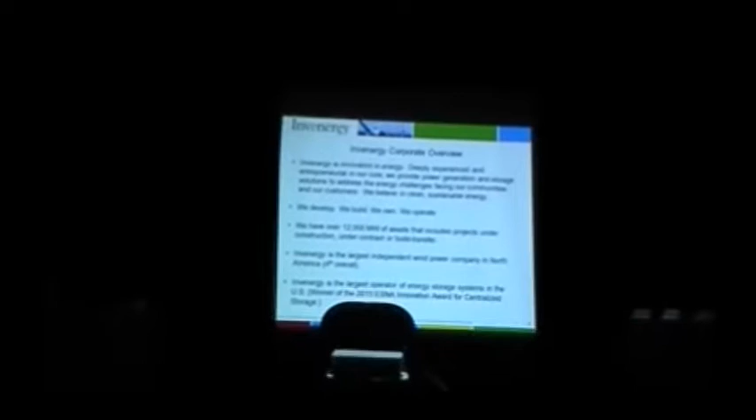Invenergy is an independent power producer. We were formed in 2001. We build, we own, we operate. Our focus is primarily renewable energy, and that was the foundation of the formation of the company. To date, we've developed approximately 12,000 megawatts of projects throughout the U.S., Canada, Europe, South America, and some projects in Japan.

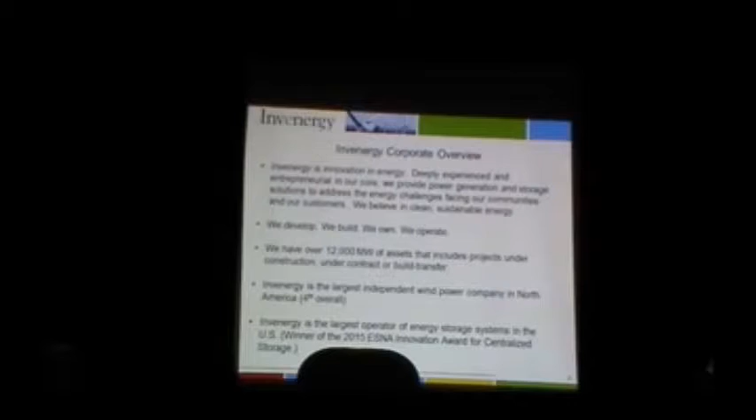We are the largest independent wind power producer in North America. We also have a number of energy storage projects, and we are actually the largest operator of energy storage projects to date. You can get a sense of the scale of projects we have here in the U.S. and in Canada. These are all wind, thermal, solar, and energy storage.

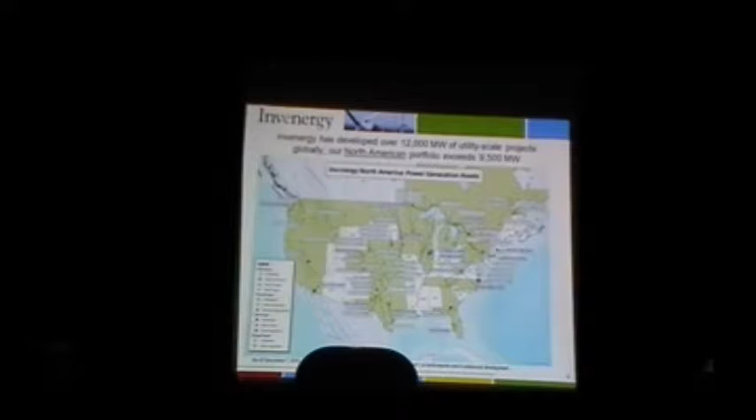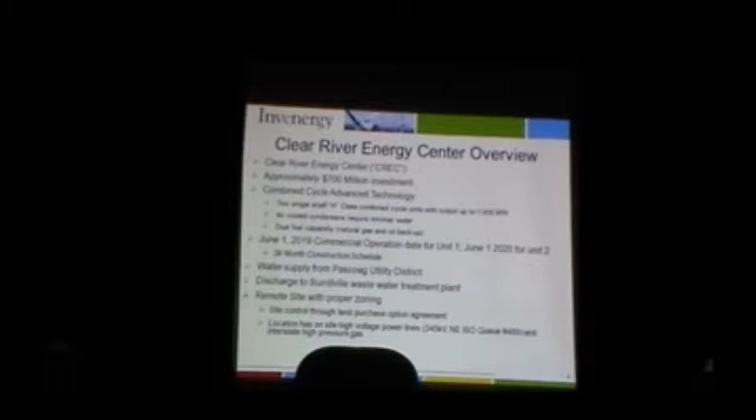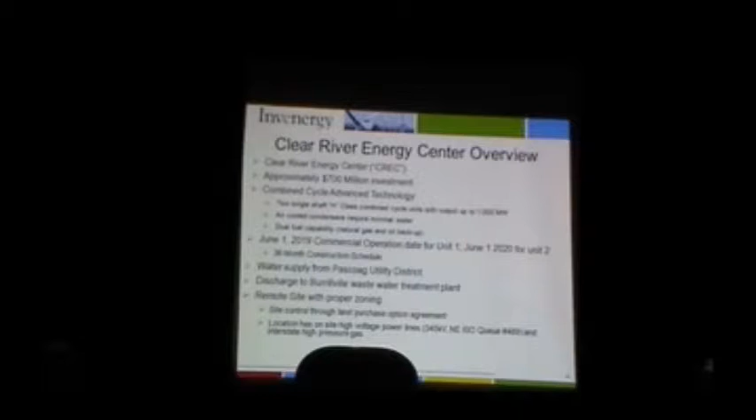The Clear River Energy Center was a project that we put together in response to signals we got from the New England ISO, who manages the New England grid. The signals come in the form of the results of annual capacity auctions they conduct every year, on a 3-year forward basis so they can maintain reliable electric supply. That's really the main reason we looked at the Rhode Island, Southeastern Mass region for locating this plant, because in the past several auctions conducted, this region had insufficient capacity, and as a result, the price the ISO was offering for projects located here was at the cap that the ISO set.

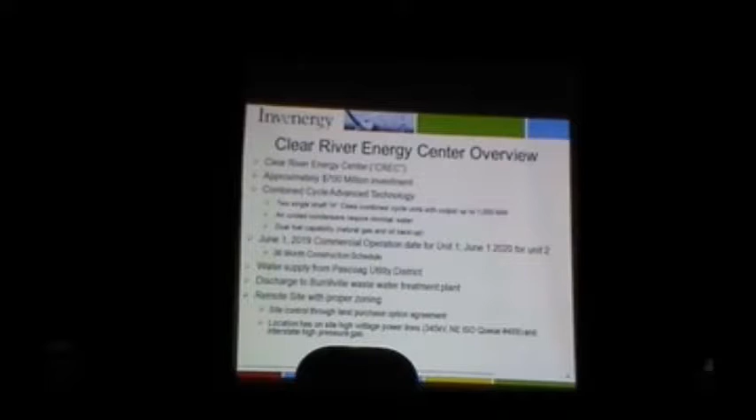So the project we're proposing is a combined cycle project, which will be the most efficient power plant in New England. We've selected GE for the technology, and this is what they term their H-class technology. Just to give you an idea of combustion turbine technology, you may be familiar with the Ocean State Power Plant, where they have 4 combustion turbines and 2 steam turbines. That plant was built back in 1987 when it came online.

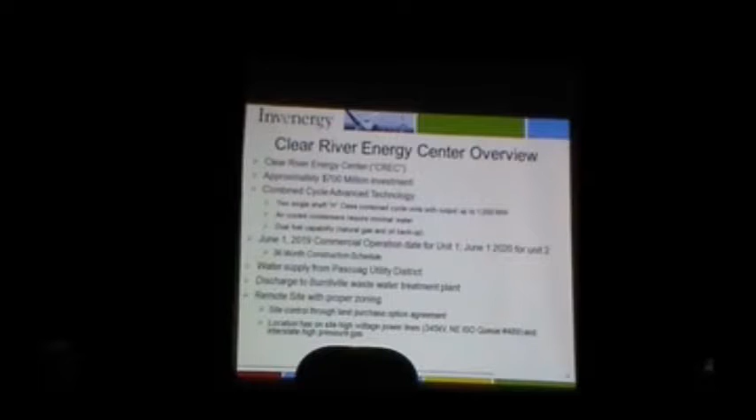The manufacturers give these machines letter designations. So the Ocean State Power Plant was called a 7EA. They've gone E, F, G, H, and in doing so, the combustion turbines have become far more efficient and produce far more power. So with a single combustion turbine and steam turbine combination, the Clear River project with just one of those units can produce roughly 500 megawatts, where back in 1987 you needed 4 machines to produce roughly the same amount of power. It also does that by being about 30% more efficient. So you can produce more power with less gas, and it also does it far more cleanly. In other words, the emissions are less on a pound per megawatt hour basis.

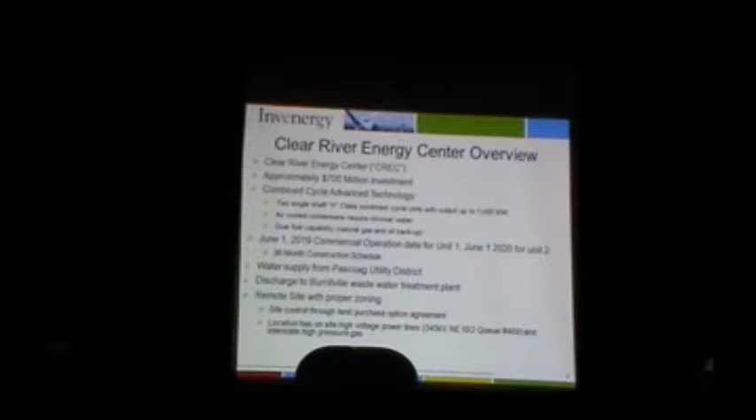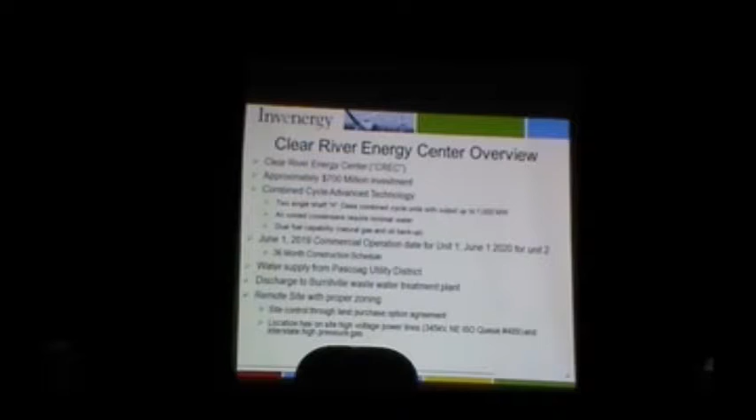We bid the project into the New England ISO's last forward capacity auction, conducted in February. That would be for an online date of June 1, 2019. We had configured the project so it had multiple, or 2 trains, 2 gas turbines, 2 steam turbines, each on a single shaft. The reason we did that was because we weren't sure—we knew there was a need for power, but we weren't sure how much the ISO would select in this past auction.

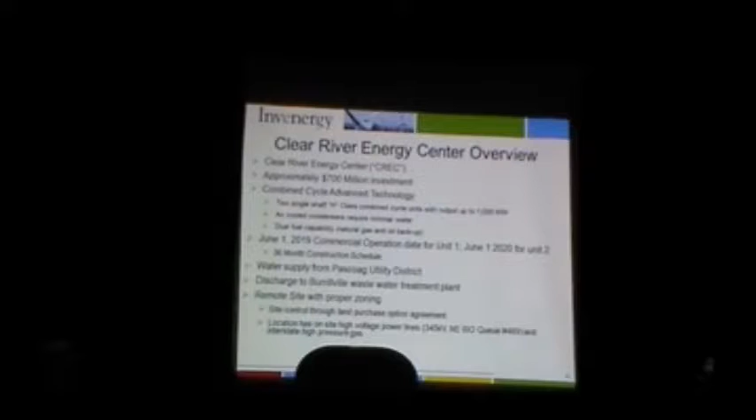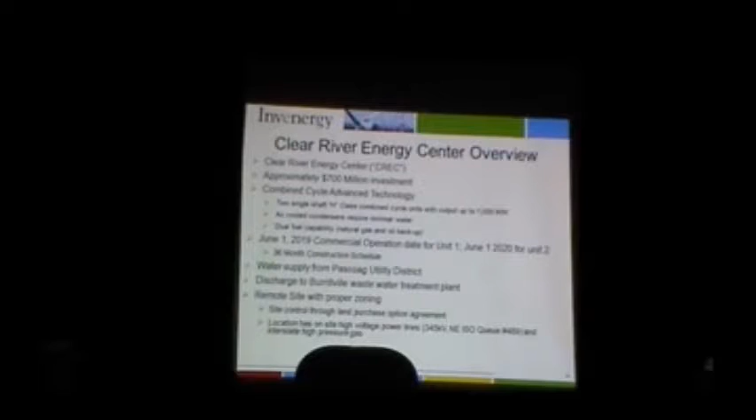So we broke up the plant into these 2 blocks, much the same way Ocean State Power did back in the day, where they did it in 2 separate blocks, just because it was not certain to us how much the ISO would accept. So the plan would be to at least have the first train online by June 1, 2019. Our plan would be to bid the second train in the next auction, held next February, and if accepted, it would have an online date of June 1, 2020.

We propose to get water supply from the Pascoag Utility District, and we have a slide later on that. The discharge of water from the plant would be to the Burrillville wastewater treatment plant.

The project is going to use air-cooled condensers. Unlike Ocean State Power, where they have a wet tower and use a lot of water and you see a steam plume, you don't have that here. You basically have a large radiator that uses air to cool the plant. As a result, the water consumption the plant needs is about 90% less than it would need if it were to use water like Ocean State Power.

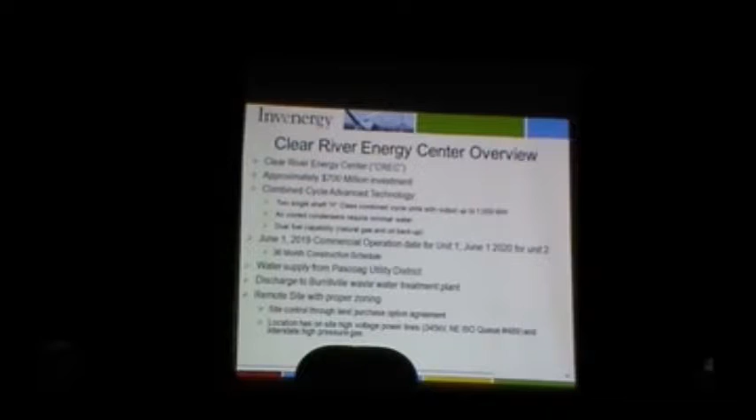The project will also have dual fuel capability, meaning we will have oil as a backup fuel. The main purpose for that is the ISO has a reliability program—they want to make sure the electric supply is reliable. If you get into some really cold winter days and gas becomes unavailable because it's all being used for heating homes and businesses in the region, the power plant usually has to come behind that use, so you can get curtailed. So you have dual fuel capability, so you can keep the lights on if that event were to occur.

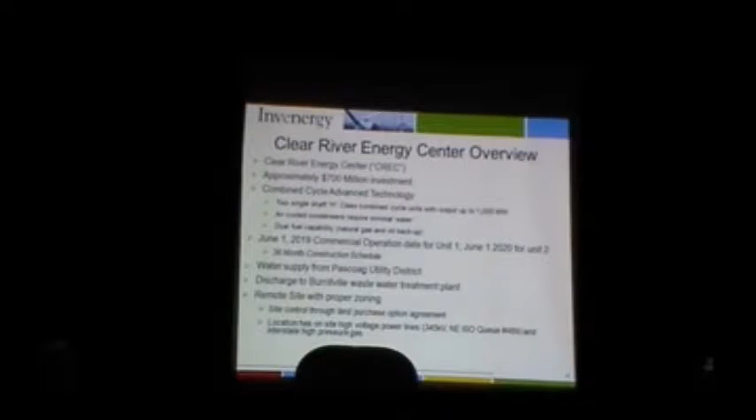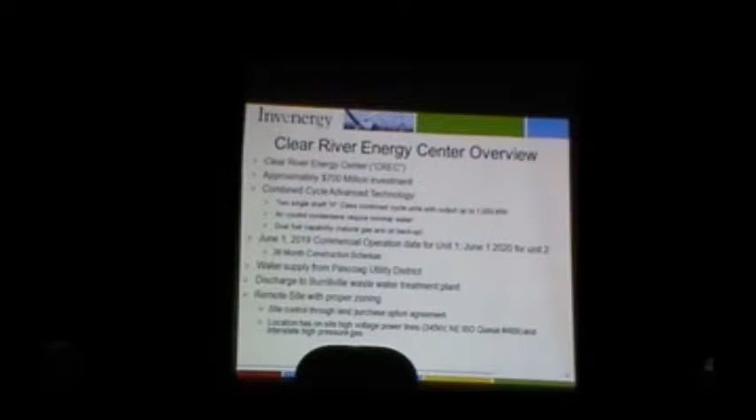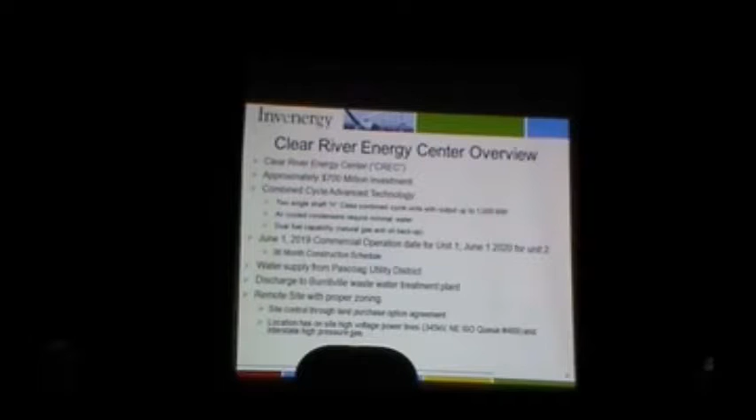One question—you were saying the ISO, you're going to bid in the second turbine, basically? Yeah. And what happens if they don't accept it? If they don't accept it, our plan is to permit for the whole unit, but we wouldn't build it. We may try to do it a subsequent year later, so you try to bid it in a subsequent year. But the way we're trying to configure it right now, our expectation is that they will accept it, just because looking at the landscape in terms of the need that's out there—there's a tremendous amount of older facilities in New England that are on the cusp of retirement, and some of those we anticipate there may even be announcements this year of additional retirements. When that happens, I think the ISO is going to be looking for power. So thank you.

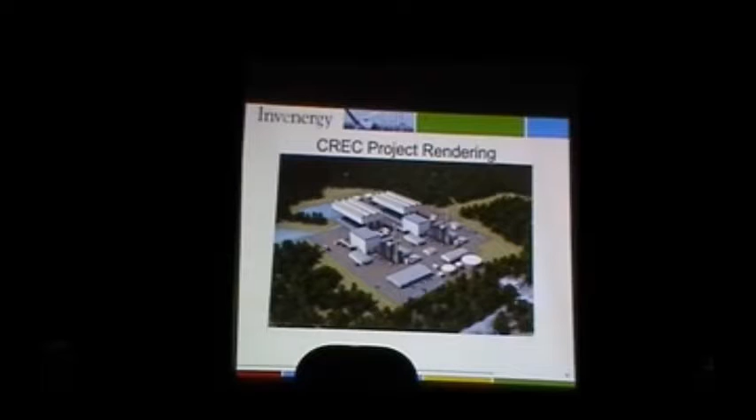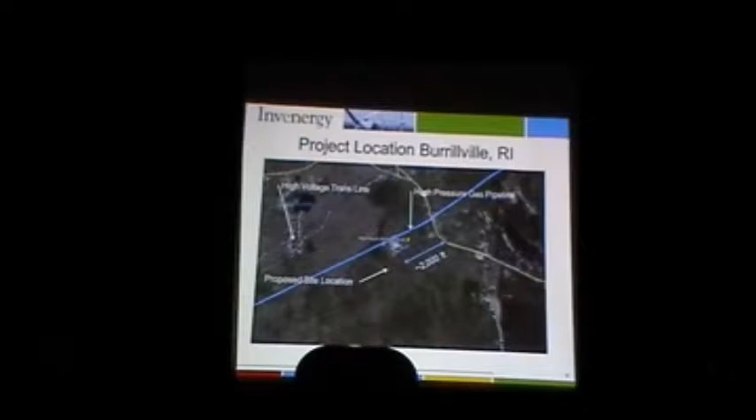The benefits we see from the project are helping to address the energy needs, as I spoke about earlier. We see that it has the potential to generate a lot of revenue for the town in terms of taxes and other goods and services the project would buy throughout its life. There will be permanent jobs, about 25 to 27 people on site—those are fairly highly skilled, well-paying jobs. There will certainly be construction jobs during the construction of the project.

Our proposal to use the water from the Pascoag Utility District involved the project actually paying Pascoag, if you will, to install a treatment system, because that aquifer, that well 3A, as you all know, was contaminated back in 2000, 2001. At the time, RIDEM was attempting to put in a treatment system. It's really the same treatment system that we're proposing to put in, except we'll put it in at a scale that will be more effective.

That treatment system has been used in various locations throughout the U.S. There's one location, Santa Monica, California, where their water table was similarly contaminated with gasoline and MTBE, and they use a carbon filter system like this. The scale of that facility is about 4 million gallons a day, serving Santa Monica, a population of 60,000 people, and they produce drinking quality water using the exact same technology. So it's been around a number of years. It's proven technology, and we have a lot of faith that it's going to be able to do exactly what we say it will do.

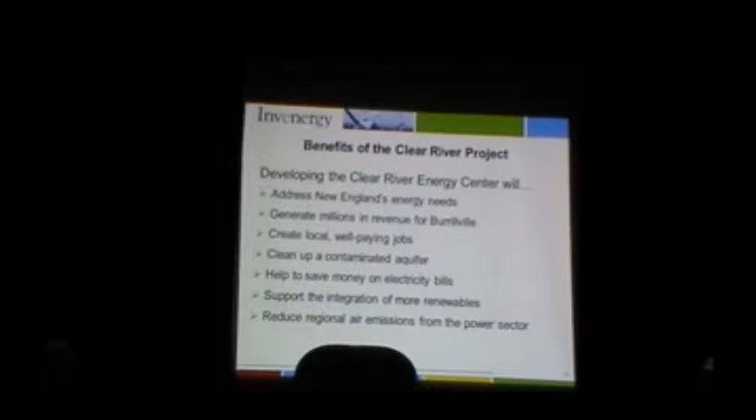The last issue here is on the air emissions. Because the project is so efficient, plugging it in now, the power being met by other generation right now—that generation, if it doesn't retire, if you bring this project in, you're going to sort of push it aside. So you're going to displace that older, more polluting generator. As a result, even with the emissions you have from this project, overall emissions will go down because you've displaced something that is that much more polluting. I have another slide on this later on we can talk about.

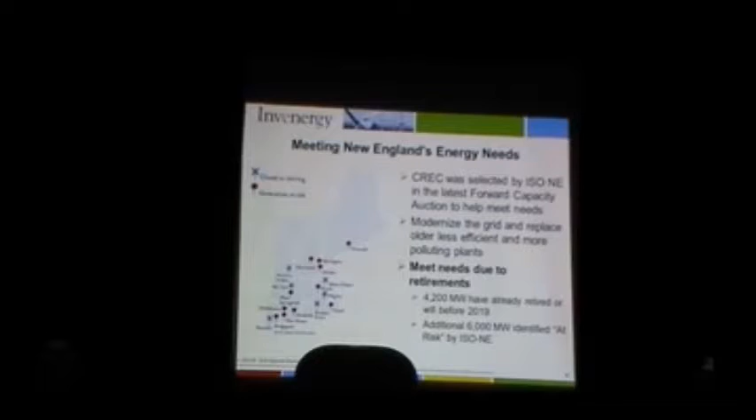To put that into perspective, the whole New England ISO is about a 30,000 megawatt grid. It's actually 28,000 megawatts peak load. We have about 35,000 megawatts of generation. That margin, 28 minus 35, is the reserve margin you need to have so that if a unit does trip, you have something else that can come on. So suffice to say that 10,000 megawatts represents a sizable chunk of the generating capacity in New England. That's why the ISO is concerned about it.

So we talked already about the job creation, taxes, what have you.

It's certainly sizable numbers. The water supply, the well 3A, as I said earlier, was contaminated back in 2001. It was shut down by a court order, a consent order by the Department of Health. That consent order said that the well could never be used for drinking water, but could only be used for remediation.

So we approached the Pascoag Utility District and said, we don't want to use it for drinking water, but we will pay for the installation of a treatment system that will remediate it, and then we'll use the water in our process. We won't use it for drinking, in accordance with the consent order, but we will clean that water up to a drinking water quality standard, so that no contamination would leave that site, and it would be controlled right at the well head.

So we will invest in the treatment system. We would pay for the installation of a dedicated pipe, and those systems would be turned over to Pascoag to operate, and we would pay them to operate those systems until such time that either the water gets completely remediated and could be deemed drinking water, or for the life of the project.

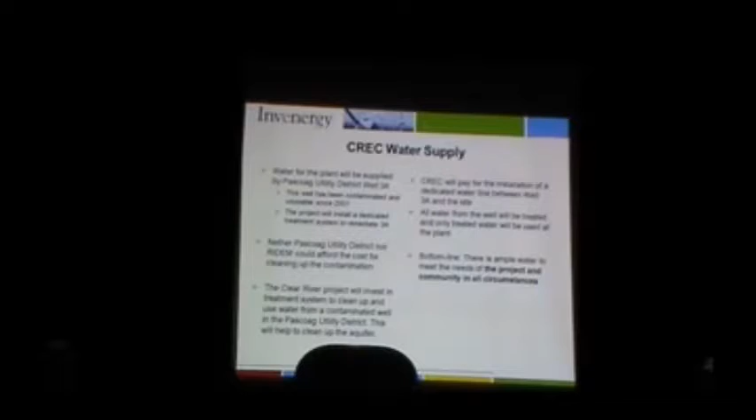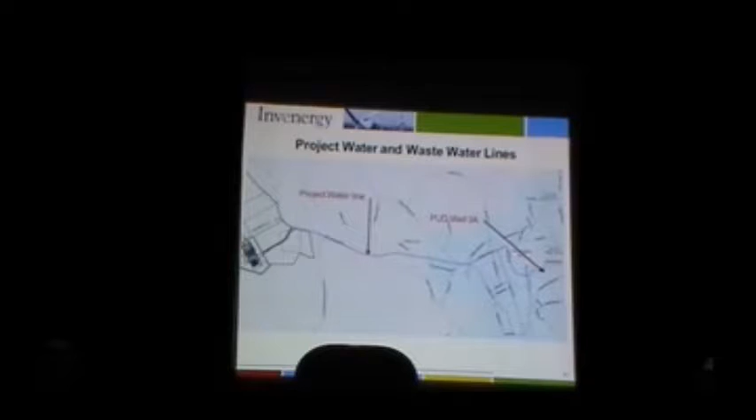This is just a graphic showing the rough location of where the well is and where we would propose to route the pipeline, down Route 100, Wallum Lake Road.

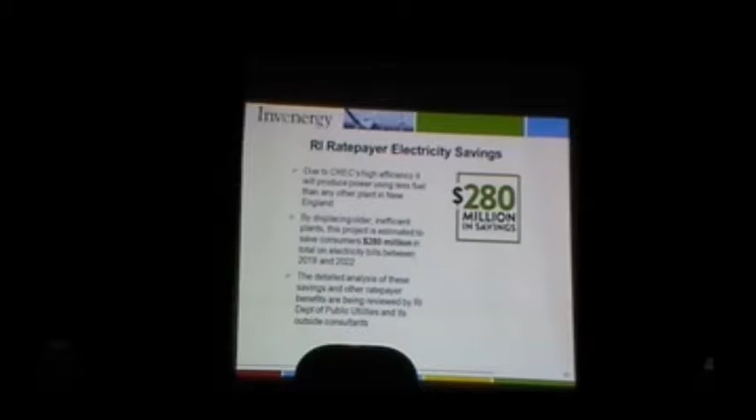This gets into the ratepayer savings a little bit. This is what I was mentioning earlier in terms of what our calculations show those ratepayer savings would be, and just to give you an idea, the $280 million, that's energy and capacity savings just for Rhode Island ratepayers, from the year 2019 to 2022. We didn't carry it out beyond that just because after 2022 it's hard to predict what other new plants may be online, or how many renewables you get. So your numbers get a little squishy beyond that.

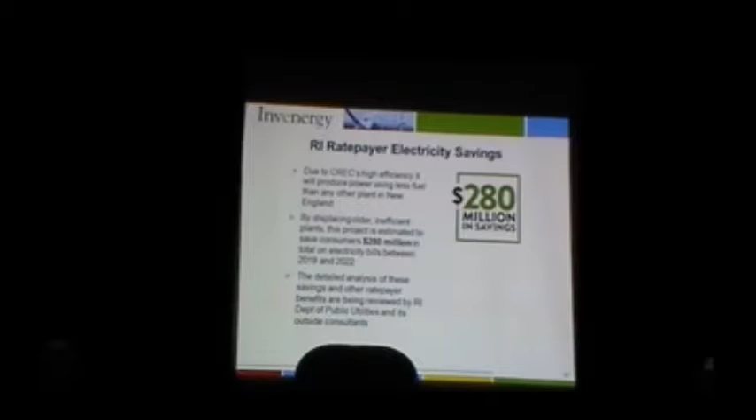But we have a high degree of confidence in numbers at least between 2019 and 22. Supporting renewables, the project does have high flexibility, rapid response, and the emissions estimates that we calculated in terms of the various criteria pollutants that we have to address in our air permit application. This reduction of pollutants includes the emissions that we have, and so you get that sort of annual reduction year over year.

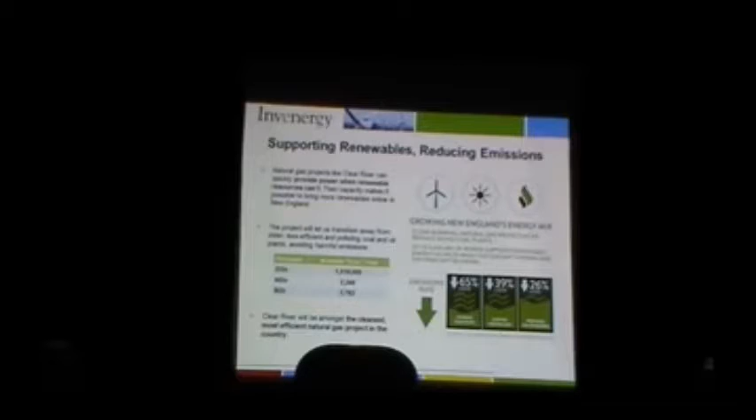That's due primarily for two reasons. One is the conversion away from oil and coal to natural gas, but also the use of combined cycle technology, which really didn't start being used until the late 80s, early 90s. There have been combined cycle plants brought on, and as time has gone on, they've become much more efficient. So this trend we expect to continue.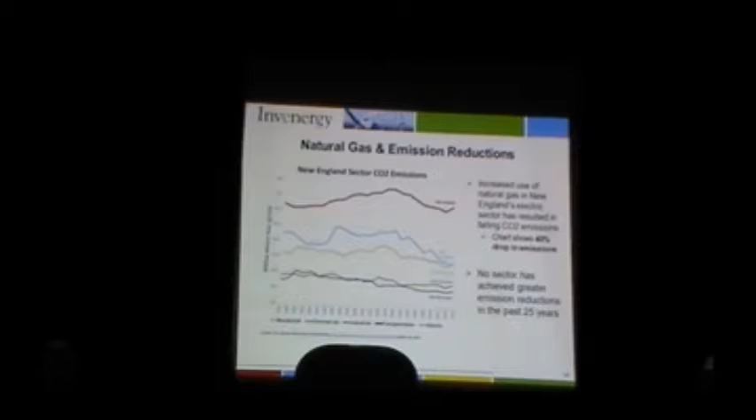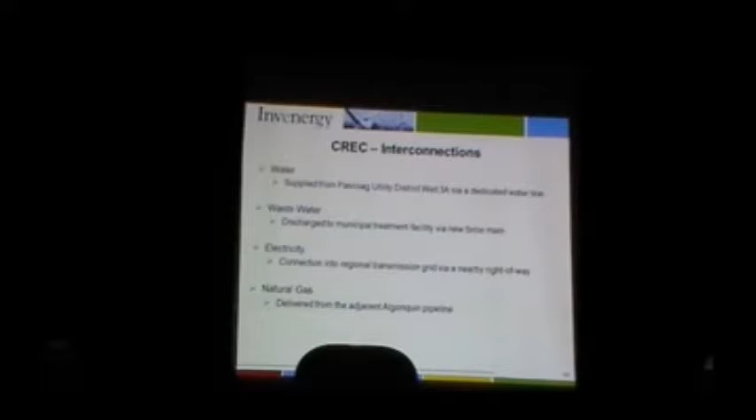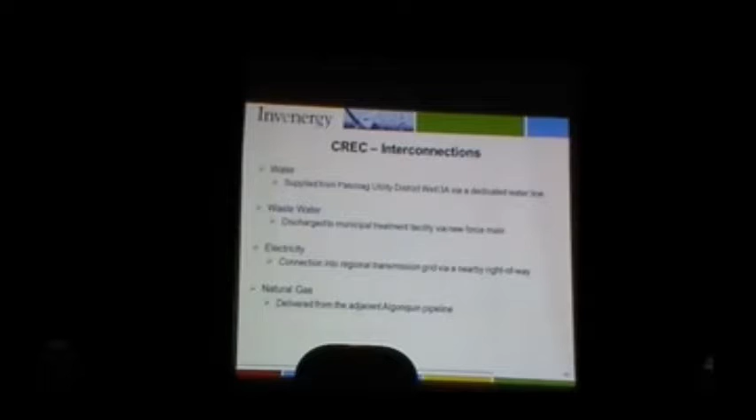So I said earlier, the interconnections that we have: water will be from the Pascoag Utility District via dedicated line. Wastewater would be discharged to the Burrillville Sewer Treatment. Electricity would be connecting into running a new 6-mile line down to the Sherman Road substation, and that would be built by National Grid. And then natural gas will be delivered from the adjacent Algonquin pipeline. We had provided Burrillville Sewer Wastewater Treatment Plant, the Sewer Commission, an estimate of our wastewater discharge quantity and quality.

They had performed an evaluation, a facilities plan evaluation of the capability of that plant to accept the water, and determined that they have adequate volume, they can accept the water. The proposed chemistry that we think we'll have was in line with their discharge permit. Anything that we send to them, they have to be able to treat, and they still have to maintain the limits that they are subject to for discharge.

And one of the things that they liked about the idea is the point of interconnection, which will be right on Wallum Lake Road. It's kind of at a dead end, at the outer edge of their system. And they like the idea of having that water flow through there and kind of flushes it out. So I think they also like the idea that we would be a major customer on their system, so that's added revenue for them as well.

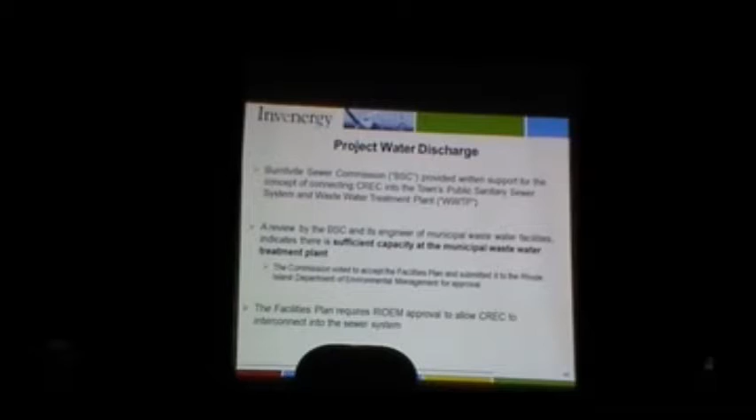The facility plan that we would have to go through would have to be approved by RIDEM. So they would put together, what do they call it, Mike? Order of approval, yeah. They would have to put together an order of approval or seek an order of approval from RIDEM. And so RIDEM would be the ultimate decision maker in that process.

The electric transmission line would go from the Spectra property here. This whole section of line here, this is all within Spectra's property. And then a new line would run down within the existing right-of-way that National Grid currently owns.

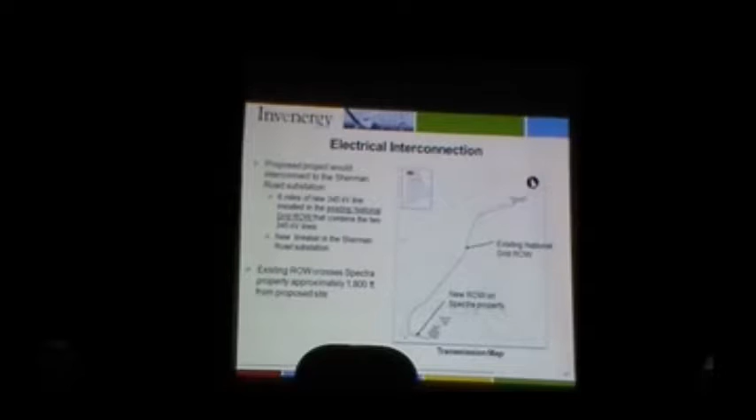There would be a new breaker installed at the Sherman Road substation. They had just rebuilt that substation. There was an old substation right next to it. They've cleared and leveled it, so there's ample space to put in a new breaker and tie the project in.

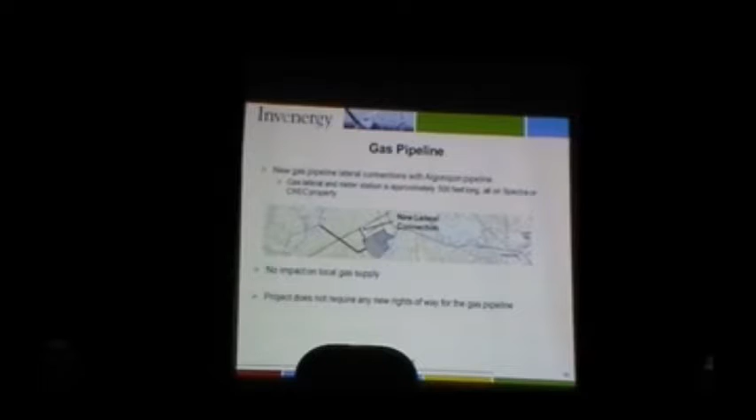The gas pipeline, as I said, it's pretty short. It's probably only about 500 feet connecting into the Spectra Algonquin pipeline, and so no new rights-of-way are required for the gas.

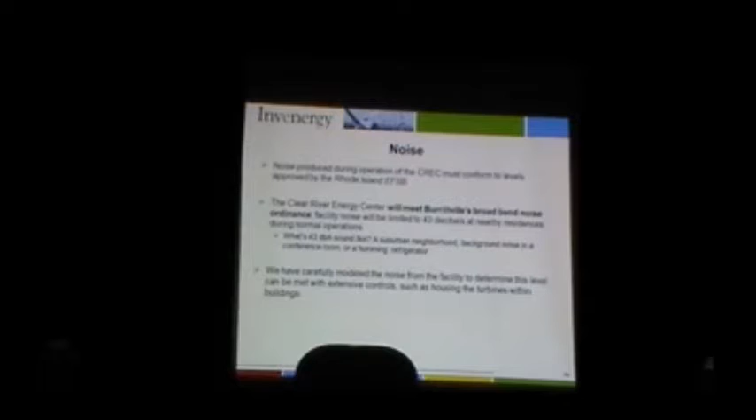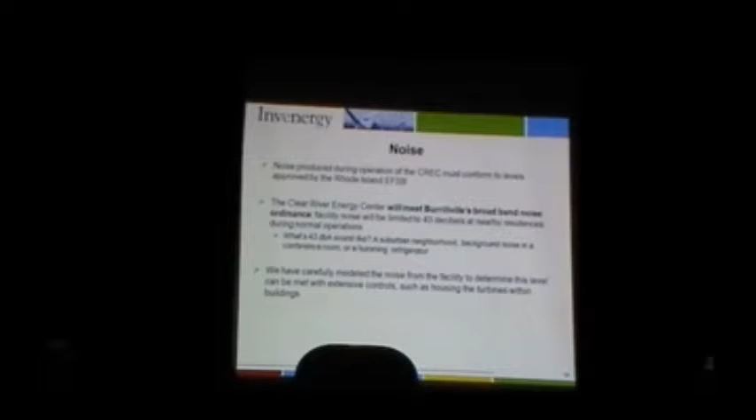For noise, as you mentioned earlier, you've seen the noise studies that we have conducted. We're proposing to meet the 43 decibels at the nearby residence during normal operations, and that includes startup and shutdown. And I think we're all aware that 43 decibels is actually a fairly low number.

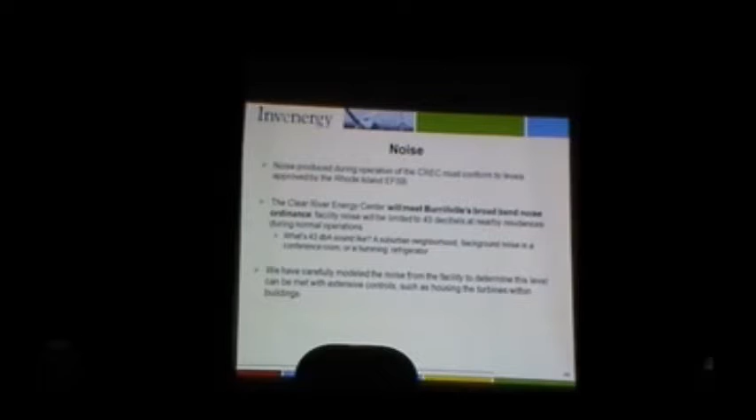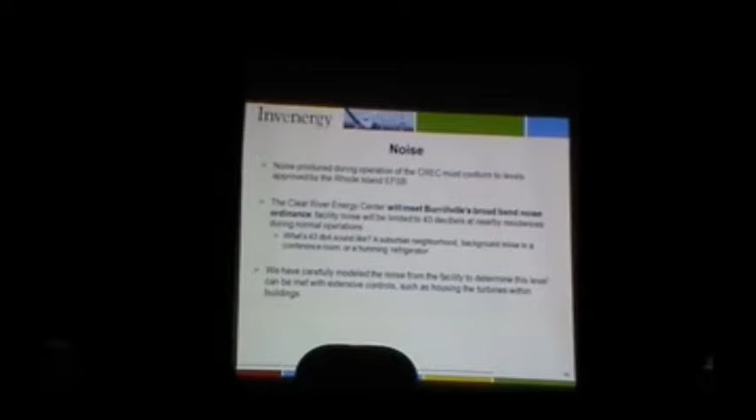It's really, it requires quite a bit of attenuation, and I can get more into that if you have some questions on that. But it's certainly not impossible. You just have to be careful in terms of the selection of the design, the various components that you use, and where you locate them, and it can be done.

The permitting process that the project has to go through is fairly extensive. Certainly the Energy Facility Siting Board application and process is one, but they are also going to be seeking opinions, not only from the town but also from RIDEM, and there are a variety of permits that the project has to obtain, for air, for stormwater, wetland impact, the water permitting, getting RIDEM involved in reviewing the use of the well and the installation of the treatment system.

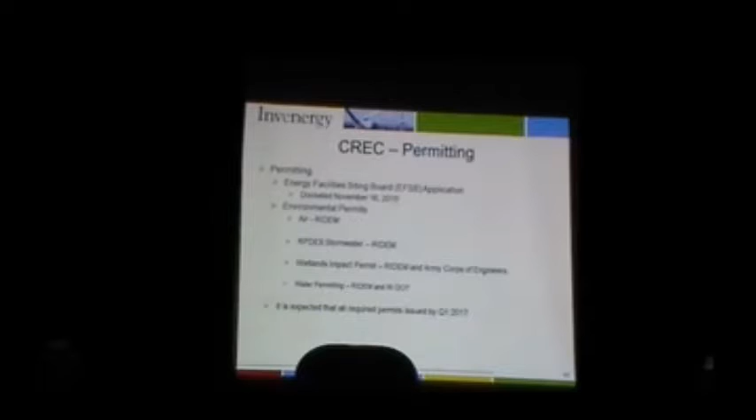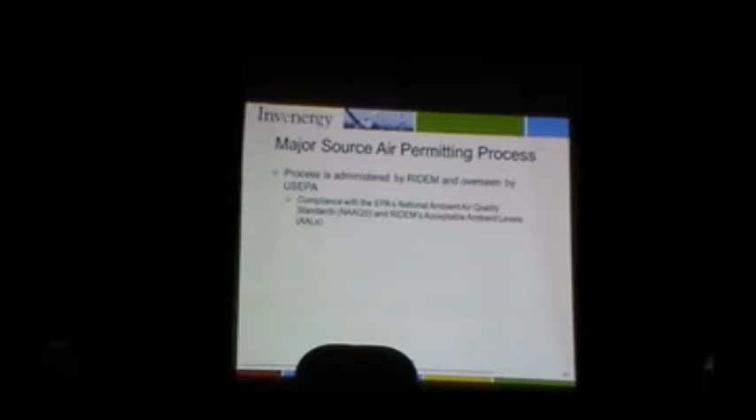That will all be governed by RIDEM, and certainly the installation of any pipelines in the road would be subject to RIDOT approval. The major source air permitting is covered by RIDEM, but their authority is really from the United States EPA, and we have to demonstrate that we're compliant with the National Ambient Air Quality Standards and all of RIDEM's acceptable ambient levels that they like to see. So that's certainly something that we have to comply with.

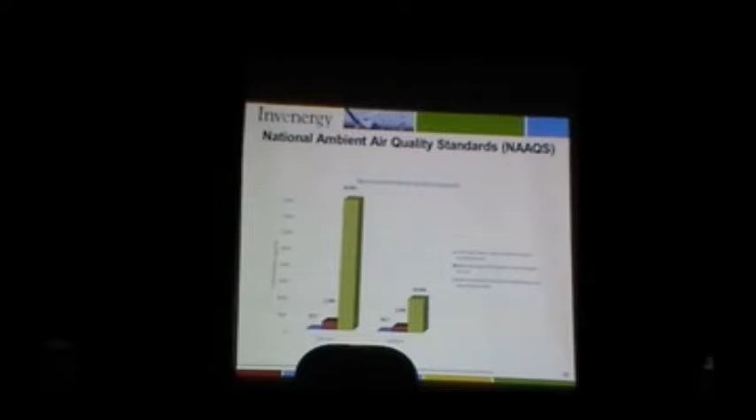It's hard to get a sense of how the standards line up and how the project compares. So I have a couple of graphs here that show you the ambient air quality standard. The green bar here is the National Ambient Air Quality Standard determined by EPA. The red bar is what is actually currently in the background in the air, and then the blue is what the project would be emitting. So this is for CO. This is for PM 2.5. NOx, nitrogen oxides.

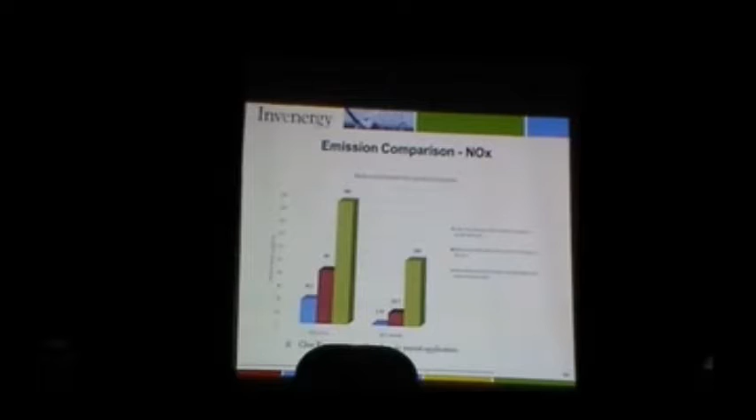So I think you can get a sense of this, that it's natural gas, it's very clean burning. The project will have an SCR, a selective catalytic reduction, and Mike can speak more about that, and a CO catalyst, so it's got advanced pollution control equipment on it. Really, the best available control technology has to be used in order to achieve the lowest achievable limit that you can get. And that's using natural gas.

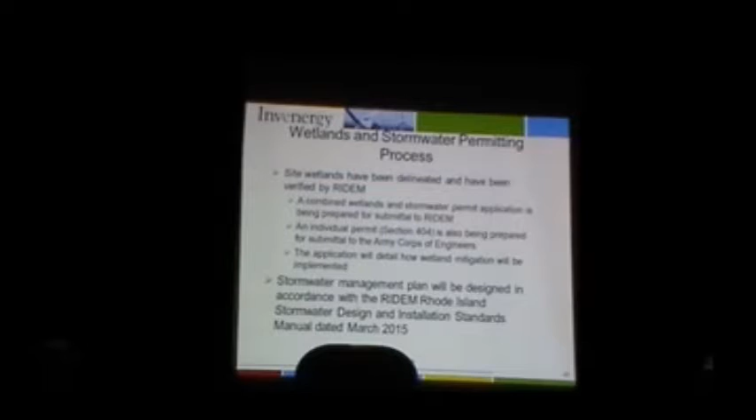Wetlands and stormwater permitting will be a combined wetlands and stormwater permit application that will be submitted to RIDEM. There will also be an individual permit including the same information that will be provided to the Army Corps of Engineers. The application will have to detail all the wetland mitigation that will be implemented, and we're working on that permit application and hope to have it here in the near future.

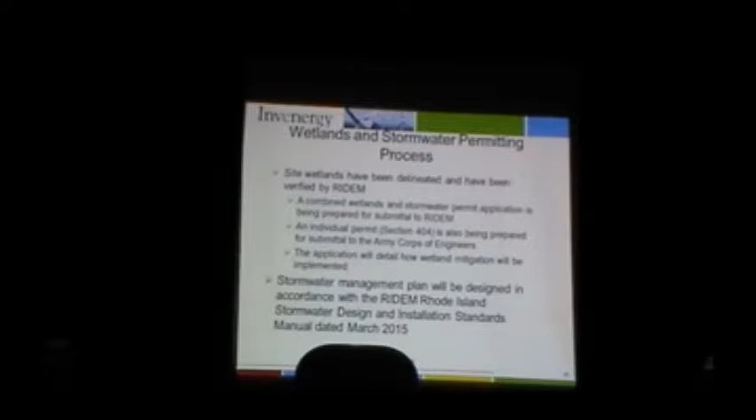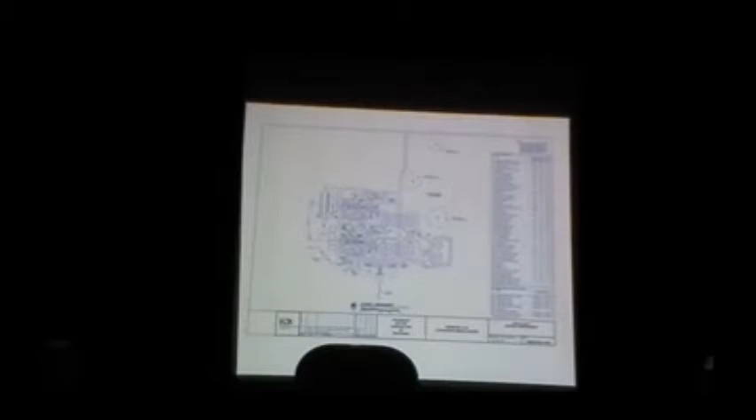This is a plot plan showing, you can see this is the boiler, it's the combustion turbine here, steam turbine is kind of hard to see, certainly. This is the air-cooled condenser, there's the oil tanks, control building, and water storage tanks. And there you can see the limits of the parcel, access road, and the adjacent compressor station.

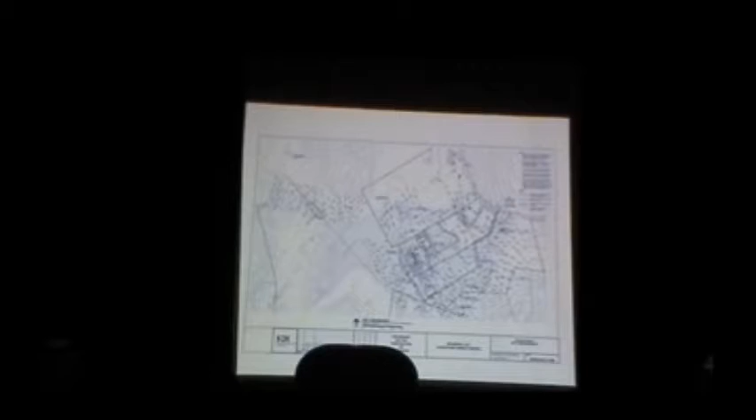Topographically, you can see not only the gradient lines, but also the shaded areas. These are the wetlands. The wetlands have been delineated and accepted by RIDEM, so they've confirmed the wetland location. The access road is generally following an existing dirt road that's there now, and there is one stream crossing right here. Yeah, right here. Okay.

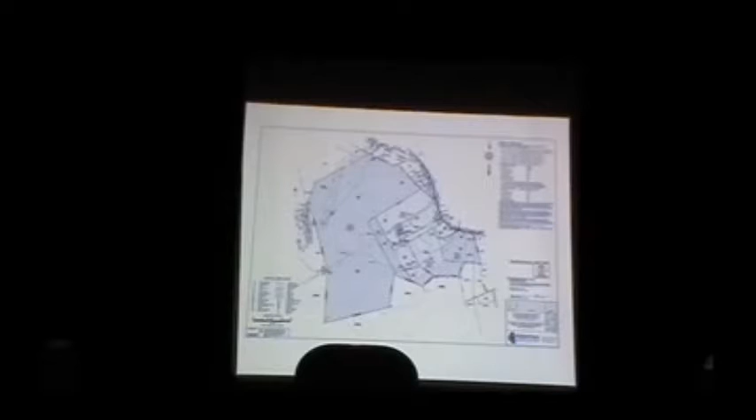I didn't know if you had any questions for John. If not, what I'd probably like to do, first of all, do you want to ask some questions? Yeah, I think we'll go down the line if we could, and if they have any questions on that, then we can go from there.

You stated earlier that you would be able to maintain the 43 dBA during startup and shutdown times also? Yes. Okay, because we had some conflicting information on that last week. Yeah, so we went through the evaluation, and what it comes down to is there's these valves that are called the bypass valves, and when you start the unit up, steam has to bypass the steam turbine. It gets dumped into the air-cooled condenser. And so we had valve manufacturer information on how much noise those valves produce.

And when we first plugged that into the model, it looked like we could probably get down to 46 dBA in startup and shutdown. And so we took a closer look at those valves, and we actually went out and found another valve manufacturer who's known to be able to produce valves that are quieter. There were 2 valves located indoors, and one of the valves was sitting up on top of the boiler. We relocated that valve inside the building, and when we did that, we were able to achieve the 43 dBA. Thank you.

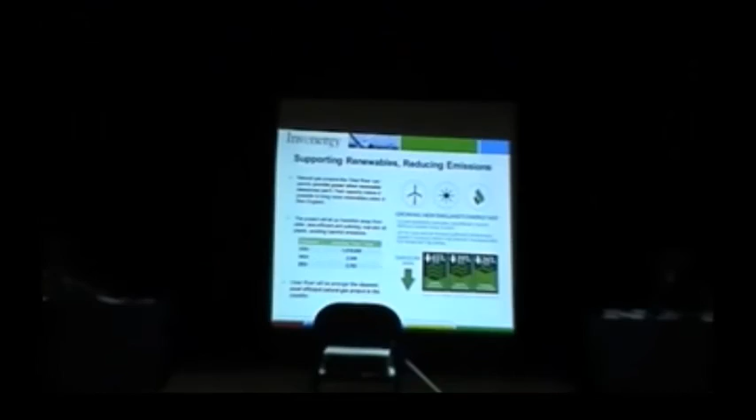But I had a question. It was on, I think, slide 13, the emissions reduction. Are those regional numbers, the emission reductions? I'm always curious to make that distinction between regional numbers and Burrillville air quality numbers, and I just don't see it enough in the presentation. It's probably a question for an environmental guy. These numbers, Tom? Yeah, those are regional numbers. Right. So to be clear with everybody here on the board, Burrillville's kind of taken one for the team, regionally. That's the way to look at this from an air quality perspective. Regional emissions come down, but Burrillville's go up.

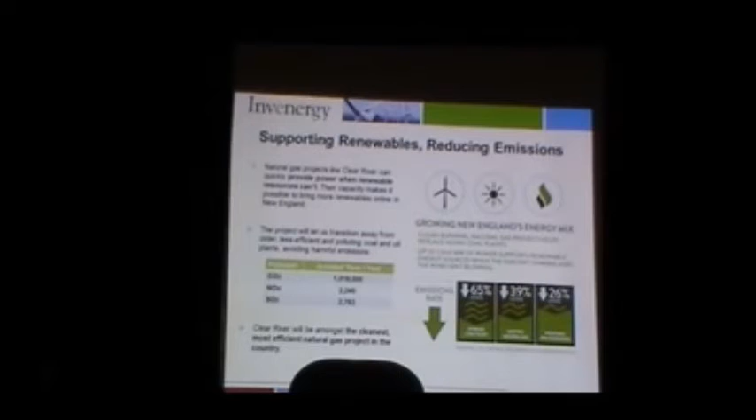Mike, maybe you could comment on the air emissions levels that you expect to see as a result of the modeling you've done. Well, I guess one important point to make is that emissions are transportable. The emissions from any given source don't just stay where the source is. They move across borders, they move across regions. So that's why it's looked at a regional level.

There right now are emissions in Burrillville coming from power plants in Connecticut. There are emissions that come from Ocean State Power that go into Massachusetts. So you really can't look at it too locally in terms of the amount of emissions, because emissions move across borders. Now, in terms of the air quality, which is the important correlation to health, the EPA has established national ambient air quality standards, based on extensive health studies of the levels at which air quality is safe for the public and the environment.

And what they require a project like this to do is to predict the maximum air quality concentrations that will come from its emissions and demonstrate that those will be below the national ambient air quality standards. So by making that demonstration on a local level, what we're showing is, although there will be an increase in emissions, the concentrations of contaminants in the air will be below the national ambient air quality standards, which are the levels the EPA has determined are safe for the environment.